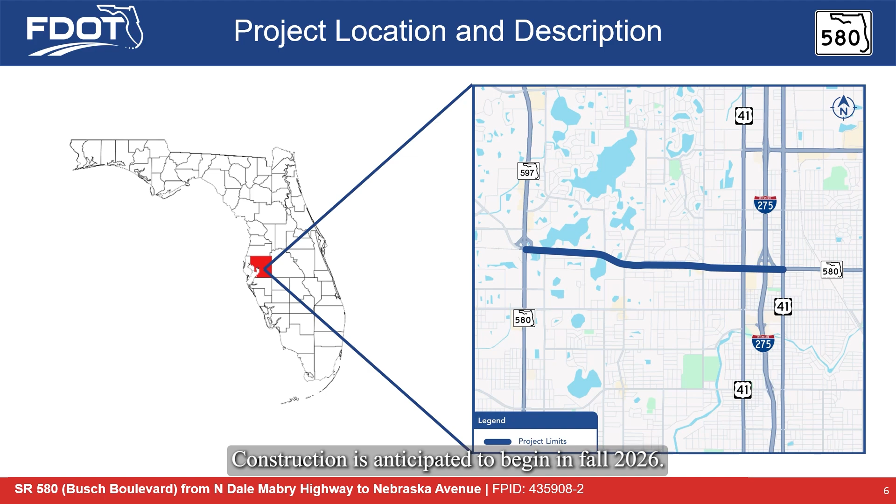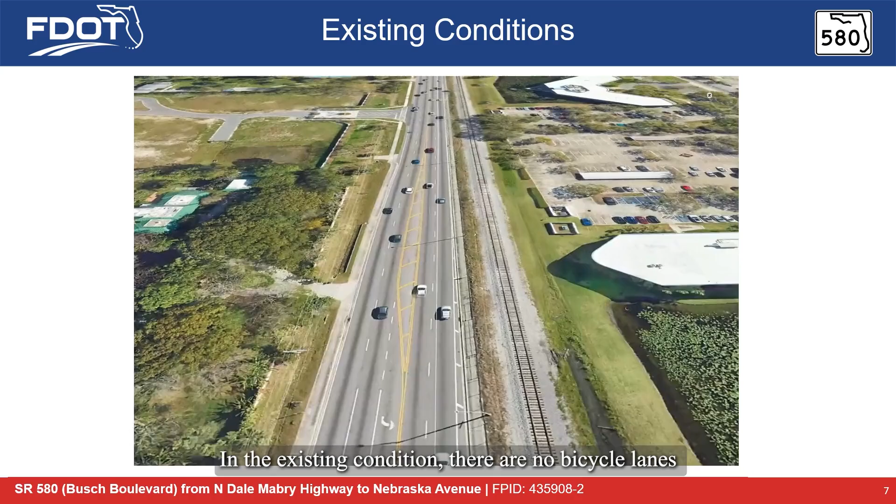The State Road 580 Busch Boulevard Corridor Improvements project spans from North Dale Mabry Highway to Nebraska Avenue in Hillsborough County. In the existing condition, there are no bicycle lanes in the corridor, and we have divided the corridor into 4 segments to correspond to the general roadway characteristics of each.

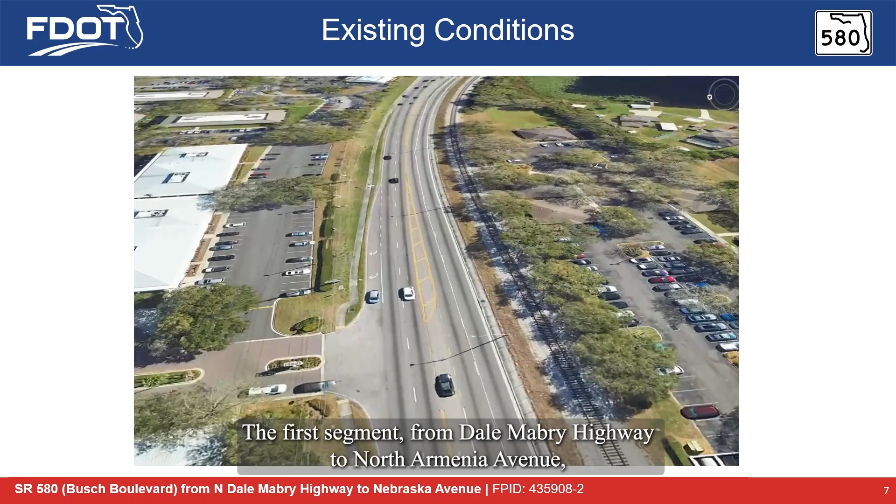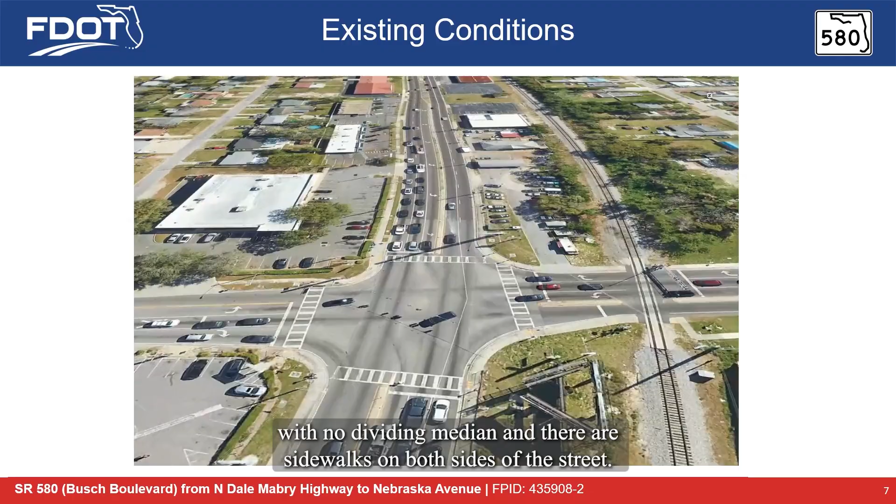The first segment from Dale Mabry Highway to North Armenia Avenue is the only segment within unincorporated Hillsborough County. The existing roadway has 2 through travel lanes in each direction with no dividing median, and there are sidewalks on both sides of the street. The active CSX Railroad parallels the roadway's south side, and residential neighborhoods border on the north side. The rest of the corridor is within the jurisdiction of the City of Tampa.

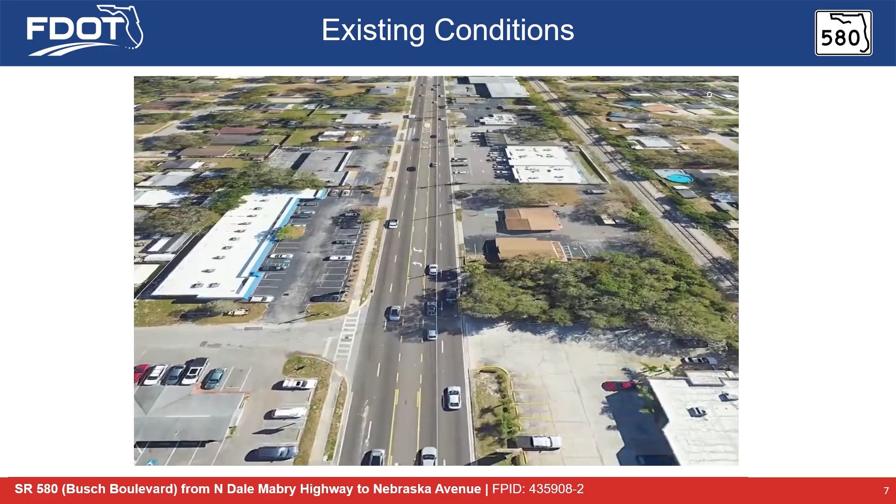In the second segment, from North Armenia Avenue to North Boulevard, the CSX Railroad transitions one block south, and a mix of small businesses border both sides of the roadway.

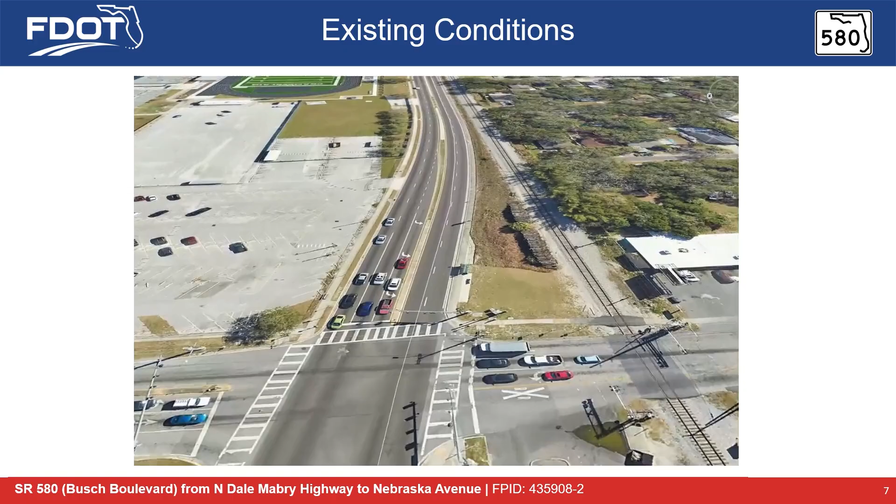In this segment, two through travel lanes in each direction are divided by a continuous two-way left turn lane. There are sidewalks on the north side, but there are sidewalk gaps along the south side.

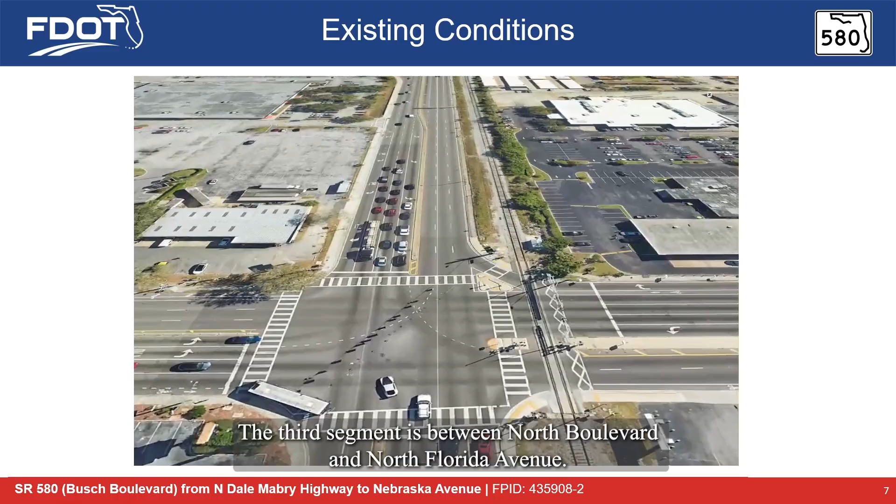The third segment is between North Boulevard and North Florida Avenue. There are sidewalks on both sides of Busch Boulevard in both segments 3 and 4. Within segment 3, the CSX Railroad again parallels the roadway's south side, and the roadway transitions back to two through travel lanes in each direction, with no dividing median. Chamberlain High School and a mix of businesses are located along the north side.

In the fourth segment, between North Florida Avenue and North Nebraska Avenue, the CSX Railroad and businesses continue to border the roadway. This segment widens to 3 through travel lanes in each direction, separated by a dividing median, and includes the interchange with I-275. The posted speed limit in segments 1 and 2 is 45 miles per hour, and 40 miles per hour in segments 3 and 4.

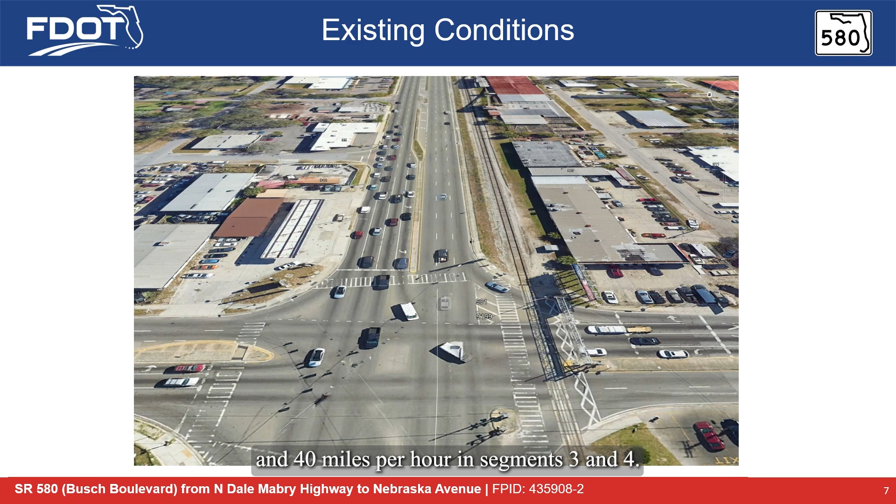On State Road 580 from North Dale Mabry Highway to east of Troutwater Lane, the department is proposing to reduce the speed limit to 35 miles per hour, milling and resurfacing roadway pavement, improve corridor lighting, narrow the lane widths to 10 feet, extend the right turn lane from State Road 580 westbound to southbound Dale Mabry, add a permanent raised median, construct sidewalk underneath Dale Mabry Highway, construct marked pedestrian crosswalk on the west side of Himes Avenue.

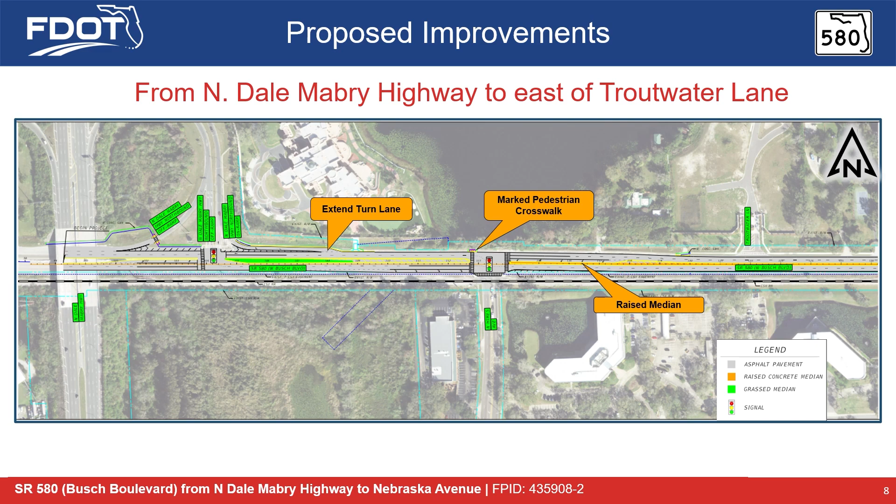On State Road 580 from east of Troutwater Lane to Orange Grove Road, the department is proposing to reduce the speed limit to 35 miles per hour, milling and resurfacing roadway pavement, improve corridor lighting, narrow the lane widths to 10 feet, add a permanent raised median, construct a marked pedestrian crosswalk on the west side of Twin Lakes Boulevard.

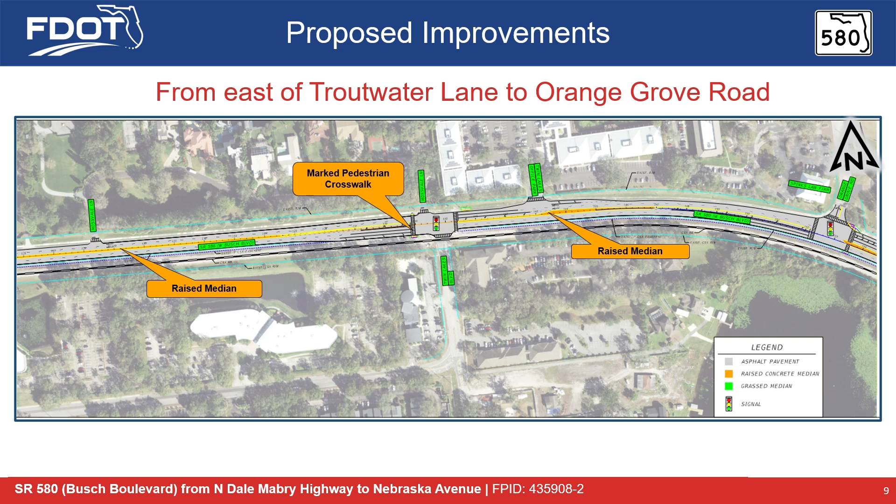On State Road 580 from Orange Grove Road to east of North Albany Avenue, the department is proposing to reduce the speed limit to 35 miles per hour, milling and resurfacing roadway pavement, improve corridor lighting, narrow the lane widths to 10 feet, add a permanent raised median.

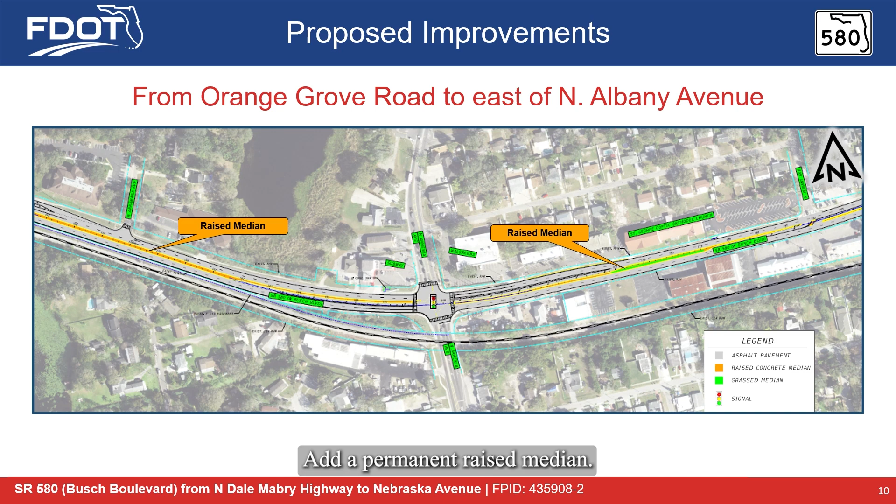On State Road 580 from east of North Albany Avenue to east of North Willow Avenue, the department is proposing to reduce the speed limit to 35 miles per hour, milling and resurfacing roadway pavement, pedestrian mid-block crosswalk with rectangular rapid flashing beacon assemblies, improve corridor lighting, narrow the lane widths to 10 feet, add a permanent raised median, construct sidewalk where right-of-way allows, construct a new traffic signal at Rome Circle.

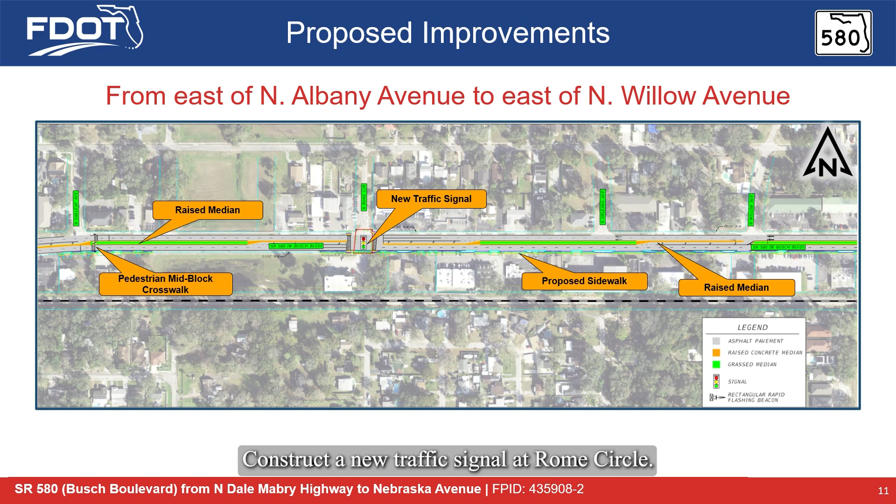On State Road 580 from east of North Willow Avenue to east of North Ola Avenue, the department is proposing to reduce the speed limit to 35 miles per hour, milling and resurfacing roadway pavement, improve corridor lighting, narrow the lane widths to 10 feet, add a permanent raised median, construct sidewalk where right-of-way allows.

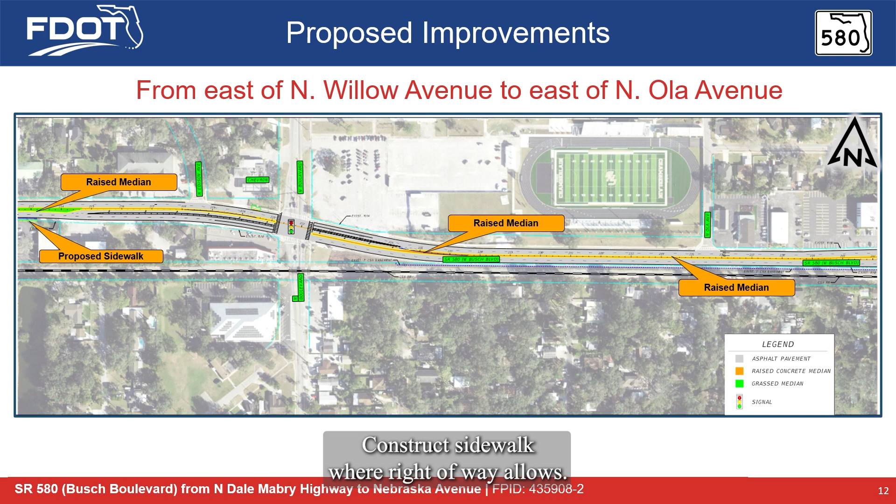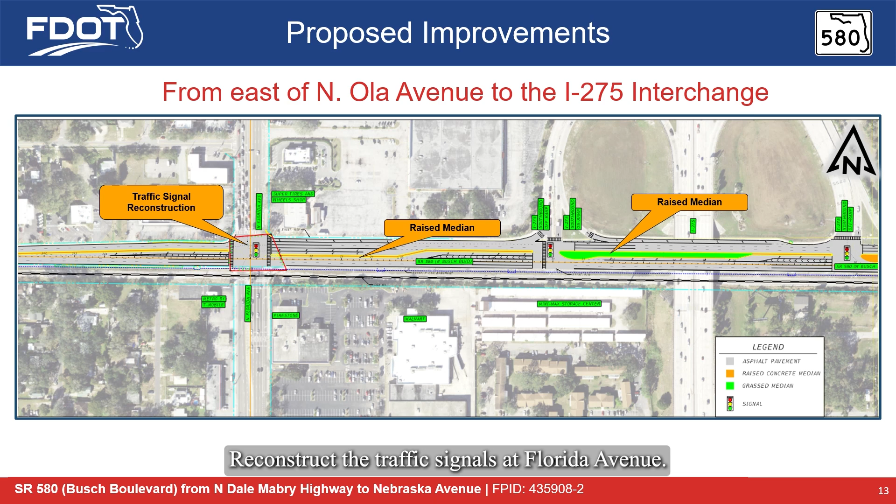On State Road 580 from east of North Ola Avenue to I-275 interchange, the department is proposing to reduce the speed limit to 35 miles per hour, milling and resurfacing roadway pavement, improve corridor lighting, narrow the lane widths to 10 feet, add a permanent raised median, reconstruct the traffic signals at Florida Avenue.

On State Road 580 from I-275 interchange to Nebraska Avenue, the department is proposing to reduce the speed limit to 35 miles per hour, milling and resurfacing roadway pavement, improve corridor lighting, narrow the lane widths to 10 feet, add a permanent raised median, reconstruct the traffic signals at Nebraska Avenue, construct dual left turn lanes from State Road 580 eastbound to northbound Nebraska Avenue, intersection pedestrian safety improvements by shortening the walking distance across the intersection.